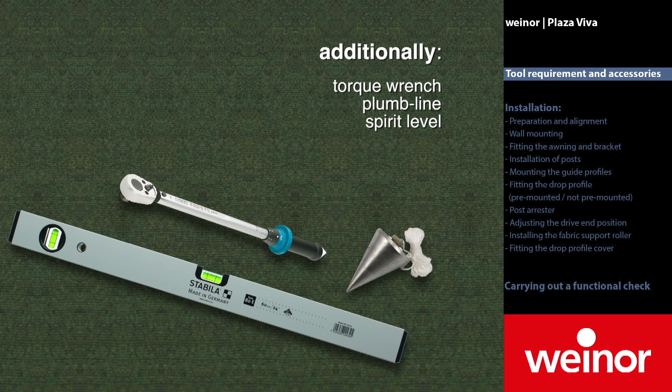The following accessories can be found in the accessory box: sufficient number of wall brackets, end caps, drop profile locking device, rope clamp, post arrester, guide rail bracket, cassette bracket, 2 cover caps. Also included, various sets of screws, crank, bracket for crank and breakout cable.

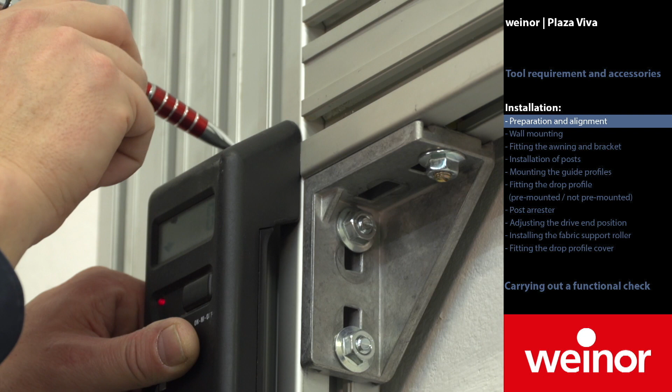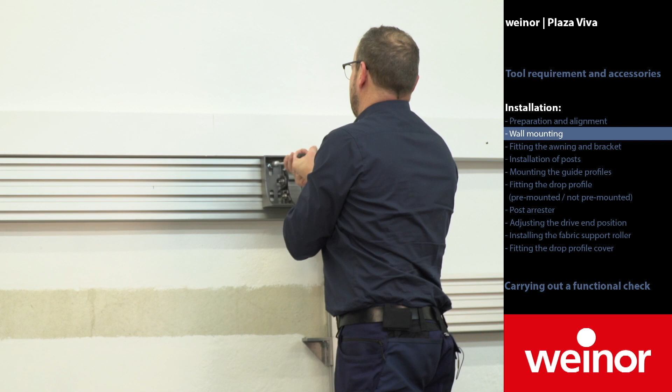In the beginning, level the heights, here illustrated with a digital hose level. Afterwards, install the wall brackets. Carry out the same procedure on the other side. Attach the awning cassette to the brackets. For heavy units, use of an awning hoist is recommended.

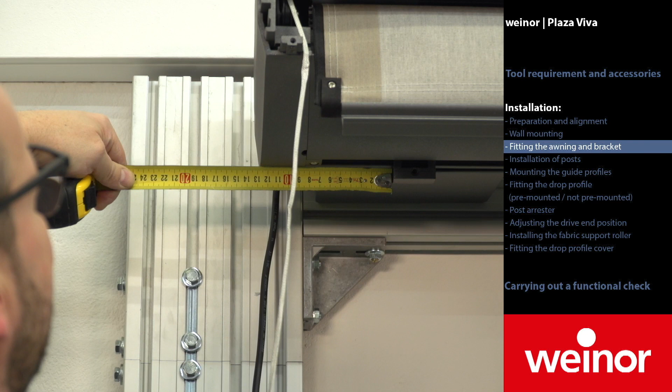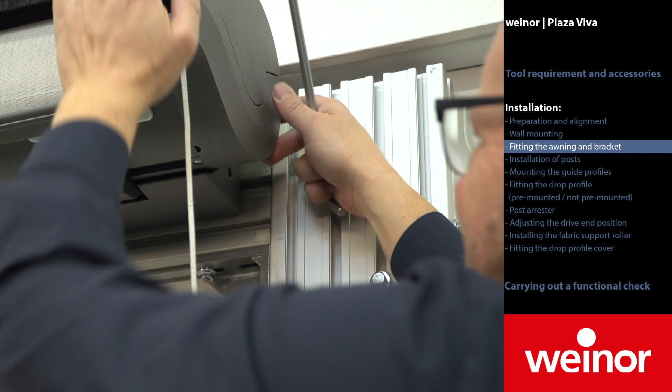We now have measured to the size of the housing bracket. The total distance to the centre of the housing bracket is 150mm. Secure the awning with the fitting blocks. Release the locking screws on the side of the bracket to be able to move the awning.

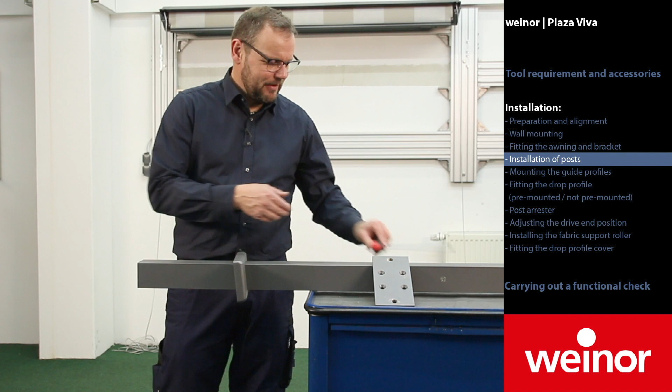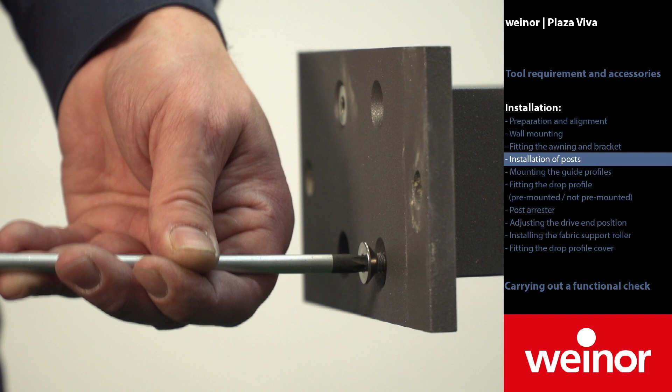Measure the positions of the posts. Prepare the posts for installation onto the ground. To do so, first slide the cover cap onto the post and then install the post plate. Align the post with the spirit level.

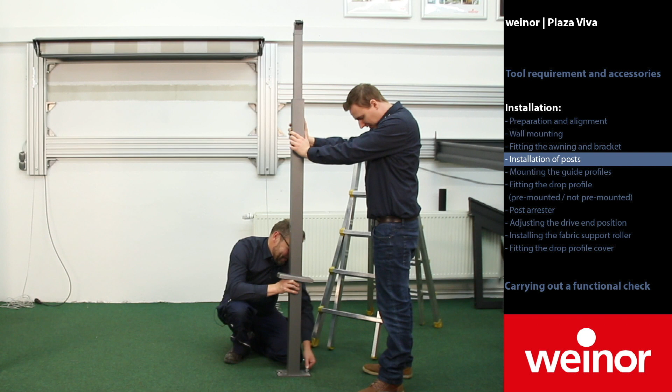Afterwards, drill into the post and install it. Carry out the same procedure on the other side. Align the post with the spirit level. Mount the guide profile.

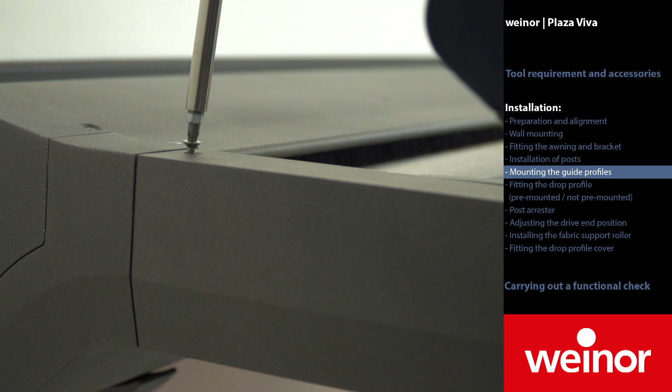Thread the fabric into the guide profile. Screw the guide profile to the cassette. Please observe previous dismounting of the screw. Carry out the same procedure on the other side.

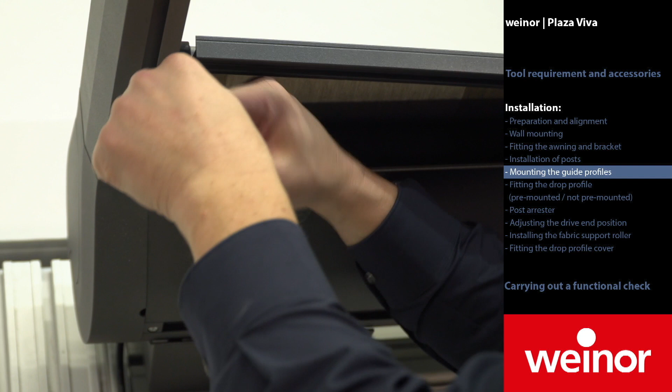There are 2 options for the Plaza Viva available for order. One option without pre-mounted drop profile and the other with pre-mounted drop profile. In this video, the option without pre-mounted drop profile is explained first.

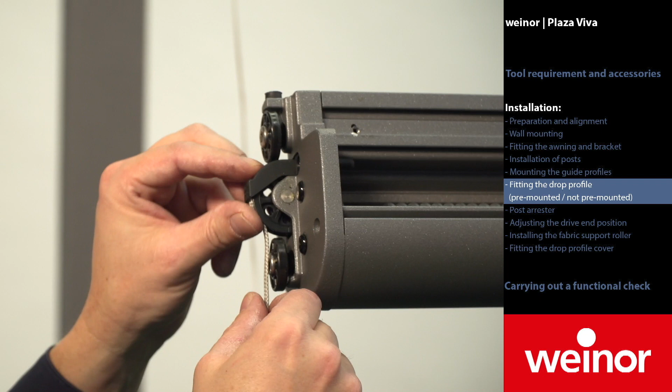Thread the flat rope into the front pulley block. It is important that the rope is threaded from the bottom into the end cap. Make sure that the rope is not twisted. Afterwards, insert the flat rope into the drop profile. Also here, make sure that the rope is not excessively twisted.

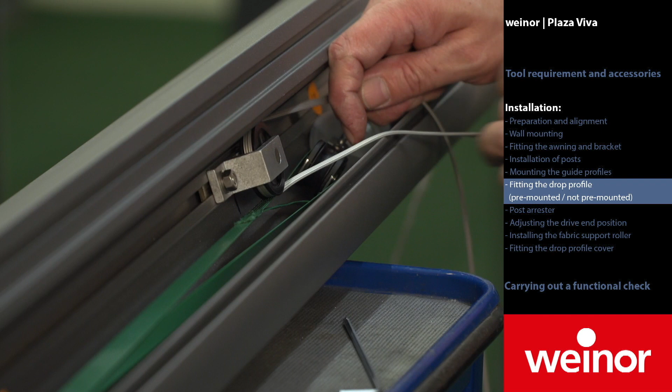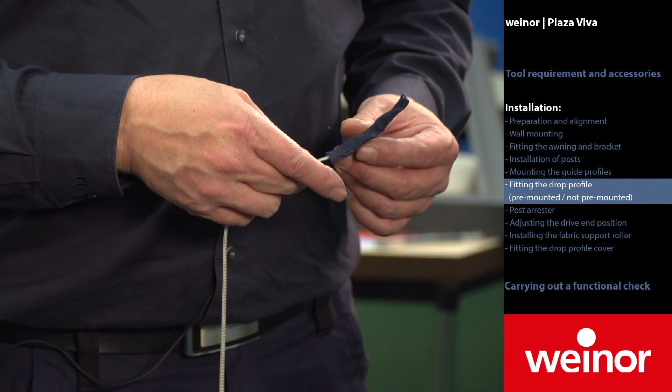First, thread the flat rope through the pulley block and then through the pulley block at the clip. Slide the flat rope through the plastic web. Thread the flat rope through the rope clamp and connect both sides. Do not tighten the screws yet.

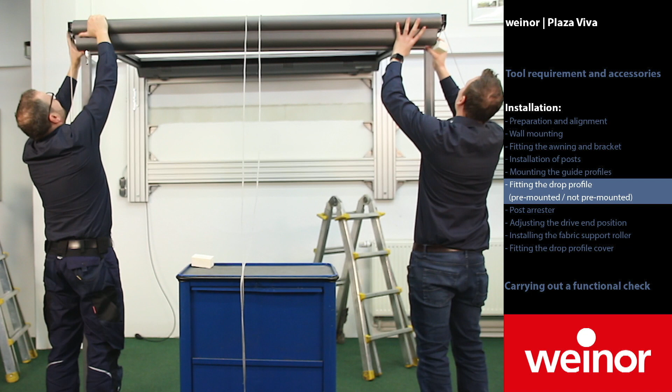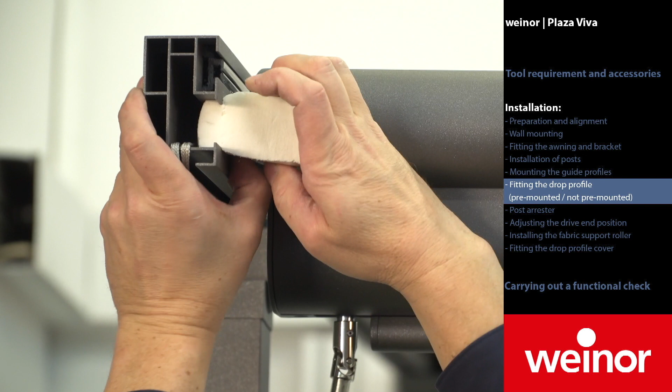Insert the drop profile into the guide profiles on the sides. In this process, make sure that the ropes are not positioned on the outside. Secure the drop profile with foam blocks against sliding out. It is recommended that the drop profile is inserted by 2 people.

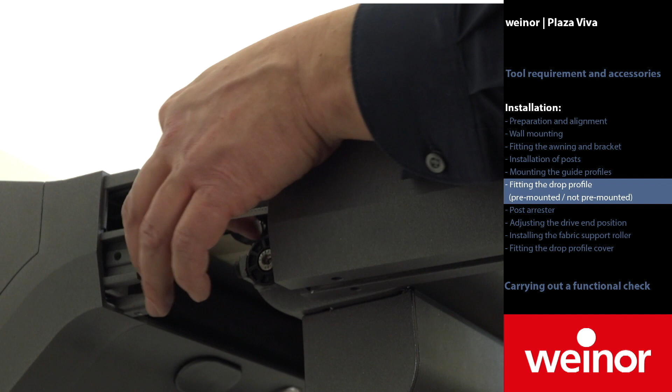Suspend the fabric at the drop profile. Secure the fabric with the drop profile. When fitting the option with pre-mounted drop profile, all ropes are threaded in and all that needs to be done is plug the guide rail on the drop profile of the awning.

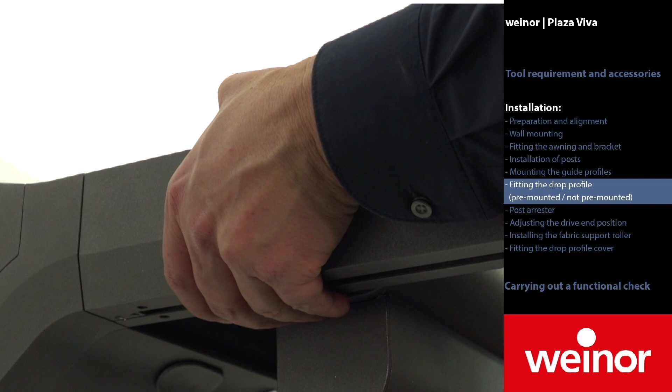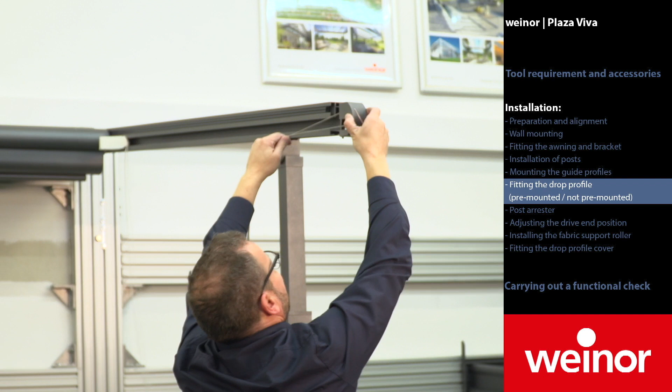Insert the end cap into the guide profile and tighten it. In this process, make sure the rope is not twisted. Carry out the same procedure on the other side. Afterwards, tighten the system with the ropes.

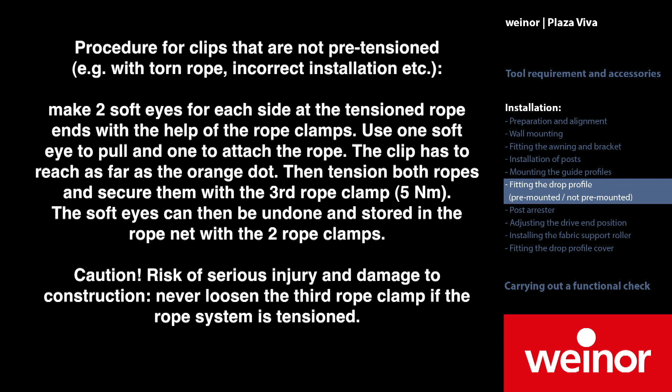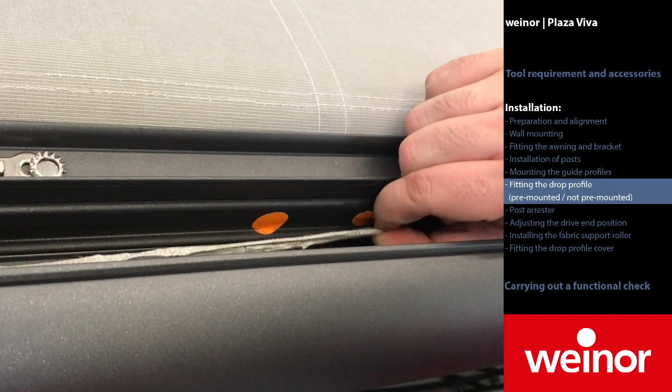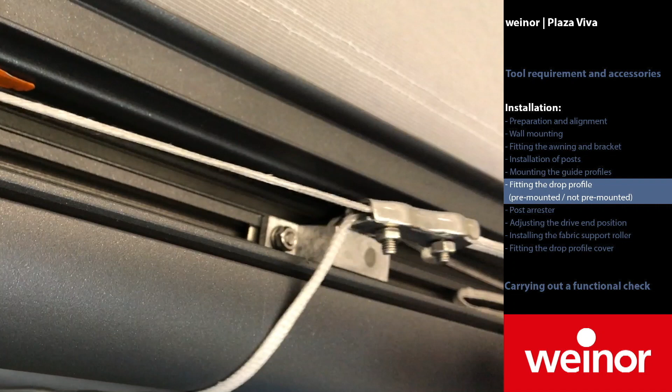Screw the support of the rope with the rope clamp. Slide the plastic protector over the rope clamp and insert the rope. Before cutting the green tape, please check the run of the rope. The rope must be tensioned and running over the rollers. Afterwards, cut the tape leader.

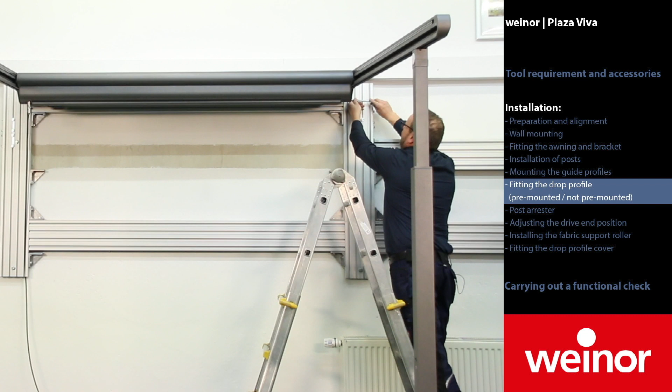On the side of the fixed post, only tighten the wall bracket. Secure the fixed post at the guide profile. Mount the arresters of the adjustable post. Do not close and open the Plaza Viva if the telescopic post is fully raised.

Provide the awning with power. The service opening for motor adjustment can be found here. Afterwards, the motor end positions are set. Move to the end positions. If the end position is reached, press and hold the close button until the awning is fully closed. The end position has now been set.

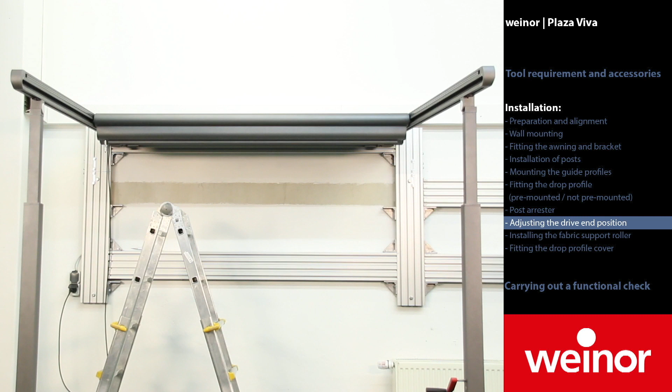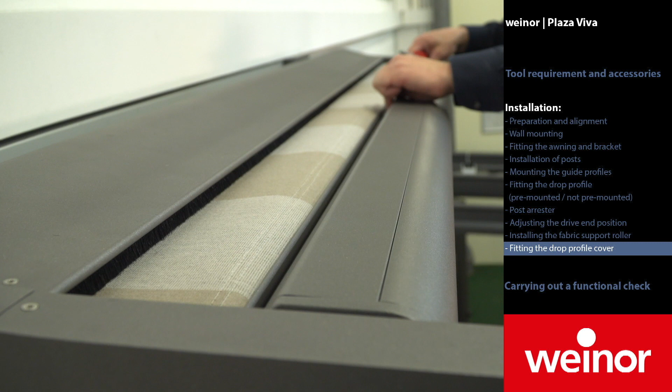With the option Plaza Viva with Volant Plus, the fabric support roller must always be mounted at the top. Please clip in the cover cap for the fabric support roller. Afterwards, attach the drop profile, cover and secure it with the included screws. At the end, check the function again.